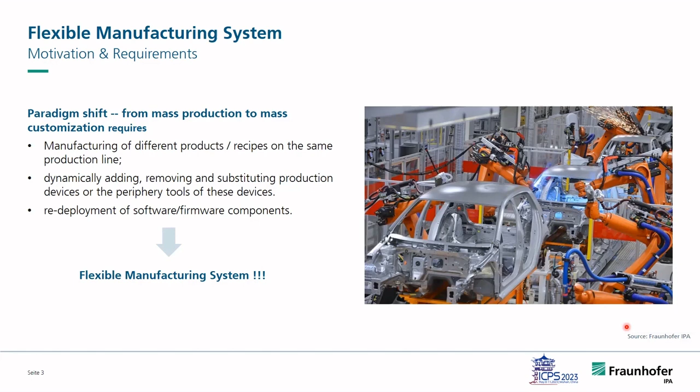More precisely, flexible production means manufacturing of different products or recipes on the same production line, or dynamically adding, removing, substituting production devices or their tools, redeployment of the software or firmware. A production system that can meet these requirements is called a flexible manufacturing system. But how to achieve flexible manufacturing has been rarely explained. For this purpose, we propose an asset administration shell-based flexible manufacturing system.

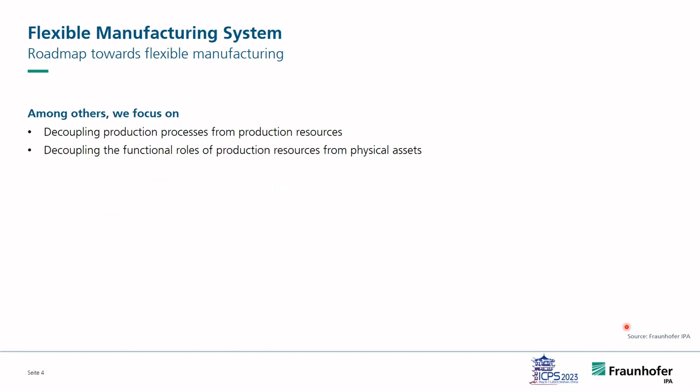Among others, we mainly focus on decoupling the production process from production resources and decoupling the functional roles of production resources from the physical asset. What does it mean? Typically, the manufacturer usually furnishes a product order configuration tool that allows the customer to specify individualized product orders and make product requests. Once receiving the product request, a product order is generated in the ERP system.

In the phase of production planning, the product order is transferred into a production order, where the production processes are divided into a sequence of process steps. We call it bill of process. One process step is defined as the process segment in the IEC standard. It should contain the information of the required production resources, namely production equipment, materials, and the qualified persons.

Conventionally, each process step or segment is directly associated with the corresponding production machines. If this machine is not available, then this production step has to be pending, or the reassignment of this production step to another machine has to be manually done by the production manager, who must be very familiar with the actual status and capability of the production machines and persons.

What we intend to do is to decouple this process segment from the physical production resources. So we introduced a virtual entity called functional role or role-based equipment. That means we introduce two kinds of abstraction. A physical production machine can be abstractly represented by its functional role within the production line, based on its production capability. On the other hand, the requirements can be derived from each process segment.

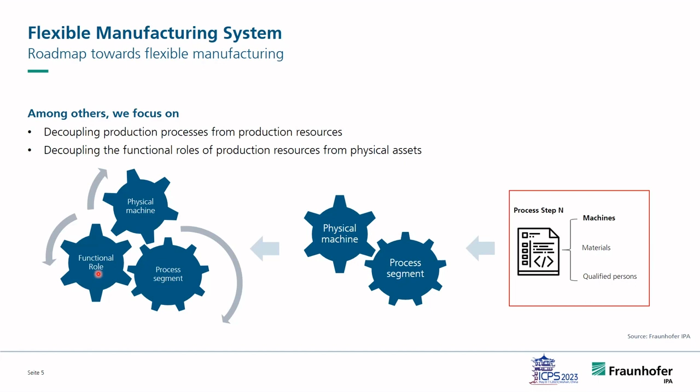Now, the assignment of a process segment to the production machine becomes a matching task, matching between the requirements and the provided capability. In this way, the flexibility is increased due to this abstraction, because the matching can be automated by the algorithm. And furthermore, a physical machine can be replaced by another machine which provides comparable capability. So this is our concept to increase the flexibility.

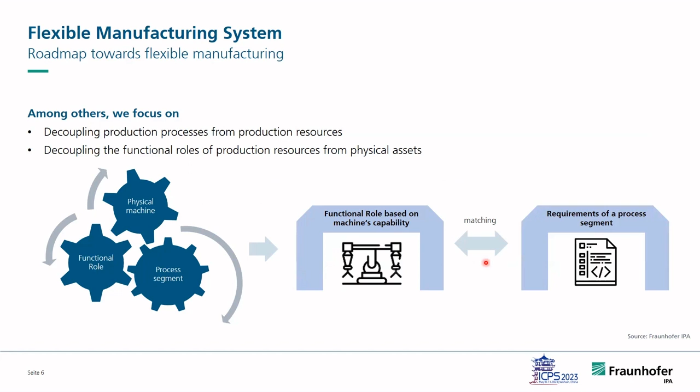The next question is how to realize this abstraction. As mentioned, we use the so-called asset administration shell. AAS is a standardized solution for digital twin proposed by Germany. Now, the government and the industrial associations are promoting this concept AAS to the international standardization organizations such as IEC.

Someone may have heard about the Reference Architectural Model for Industry 4.0, or in short, RAMI 4.0. AAS is the implementation of RAMI regarding information modeling. Today, when we talk about the digital twin, I suppose for most people it often refers to a kind of 3D animation model for simulation or visualization. But the digital twin, as it is defined, is far more than a 3D model.

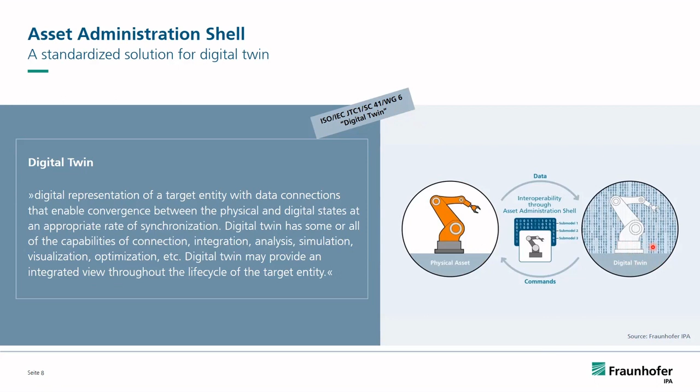In RAMI, physical asset is accompanied by its AAS that contains an interoperable information model to represent these physical assets in various aspects, covering the entire life cycle of assets from conception to recycling. Assets can be physical machines, products, process, or IT service, etc. So it does not have to be a machine. The key word here is interoperable and the various aspects.

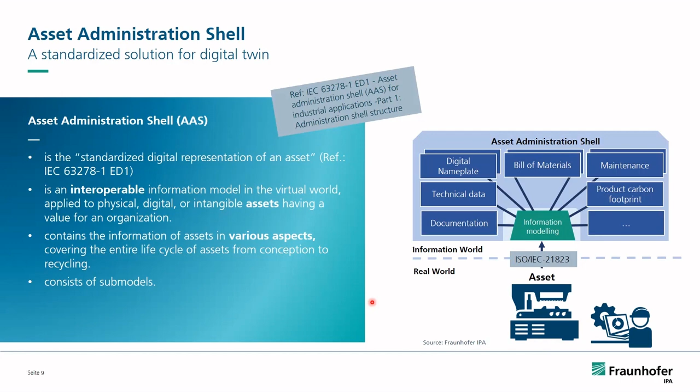Various aspects means for different purposes, in different use cases, we usually need different information about the assets. In AAS, the information in different aspects can be carried by so-called submodels. For instance, the submodel digital nameplate carries the information for identification. The submodel technical data is for the technical specifications of the assets. In this way, the AAS-based digital twin can represent any required information of assets, rather than only a simulation model. In contrast, a simulation model itself can be a submodel of AAS.

The major advantage of AAS is that it ensures interoperability and unifies the namespace regardless of software applications, enabling both vertical integration within enterprise and horizontal integration across the value chain. So this interoperability is mainly achieved by using standardized submodel templates and semantic identification. So the meta model and the specification of AAS has already been standardized as the IEC standard in the last year.

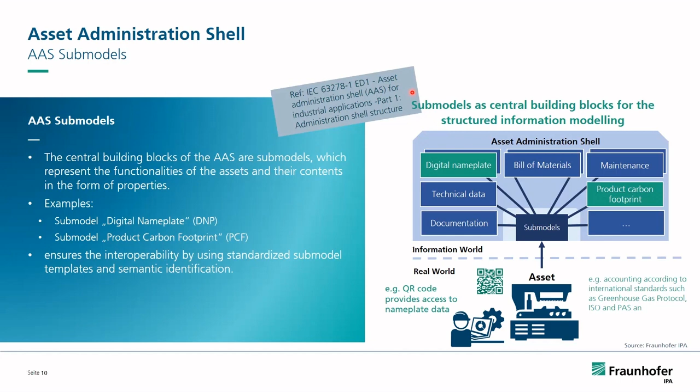And the submodel templates are now developed and standardized by the so-called Industry Digital Twin Association, IDTA. Companies like Siemens, Bosch, Microsoft, Festo, etc. are all members of this organization. The industry people and the university and the research institute sit together to develop the submodel templates.

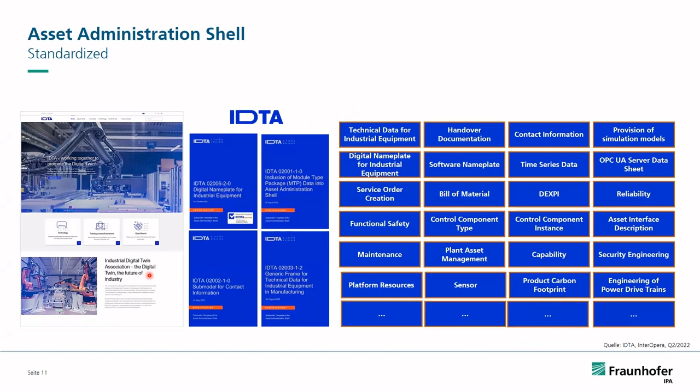As a summary, the AAS looks like this diagram. It has a unique identifier and also contains the identifier of the represented assets. The information is carried by various submodels, depending on use cases. It provides APIs such as MQTT and REST API that can be invoked by other software applications to fetch or fill in the information and data in the AAS and submodels.

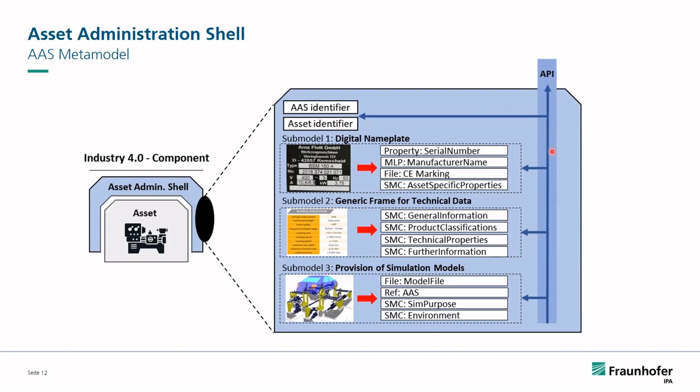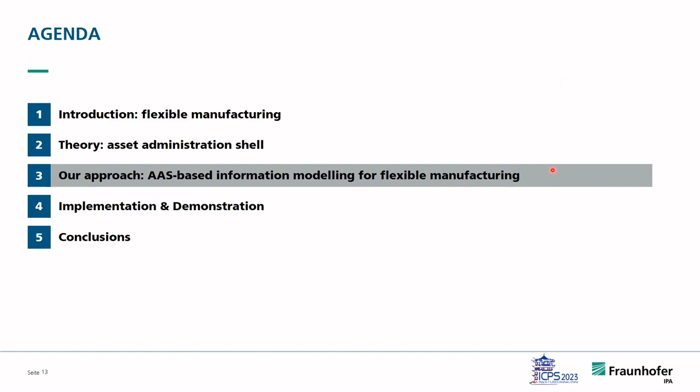Now we have an overview of AAS and the submodels. How we can use AAS for information modeling to realize our goal for flexible manufacturing? Below is the information flow of the proposed AAS-based FMS for production planning and control. For production ordering, the product-related information can be provided by a predefined AAS of the product type to the customers. The AAS distinguishes between instance and type. As mentioned, once a product has been ordered, the AAS of the product instance is initialized. The product order, the production order, etc. can be modeled as submodels of product instance AAS.

Taking production order as an example, in the AAS meta model specification, several classes are predefined as the so-called submodel elements, such as a property, a reference element, a file, blob, operation, etc. Each type of this submodel element has its own functionality. They are the basic building blocks for information modeling with AAS. The most common one is the property. For instance, the production order, production type, etc. are defined as the properties. They can have different value types: real, int, a string, whatever.

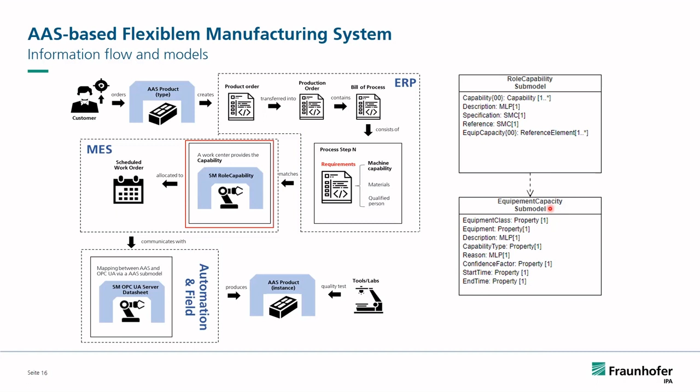Now we have every piece of information for production planning. Matching the requirements with the equipment capability can be done by algorithm. In this way, the planning process can be automated. Moreover, if physical machines are not available, this functional role can be assigned to another machine with equivalent capability.

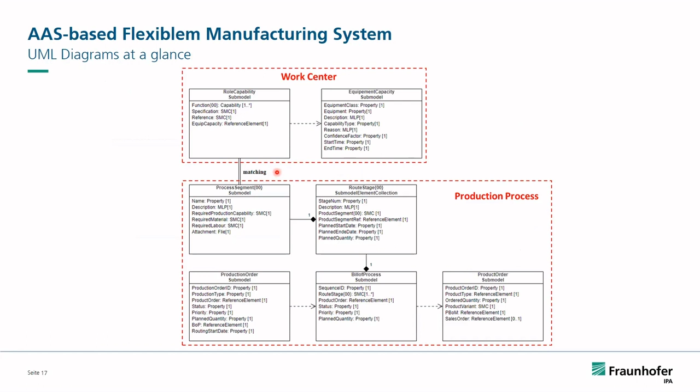We implement this approach using different tools. The AAS modeling is done by using AASX Package Explorer, which is an open source tool developed by the organization IDTA that I mentioned before. As can be seen, the physical asset has two AAS. One represents its physical characteristics, which is typically given by a machine supplier. The other one is its functional role in a production line, containing information such as the location, capability, and the OPC UA server information for monitoring.

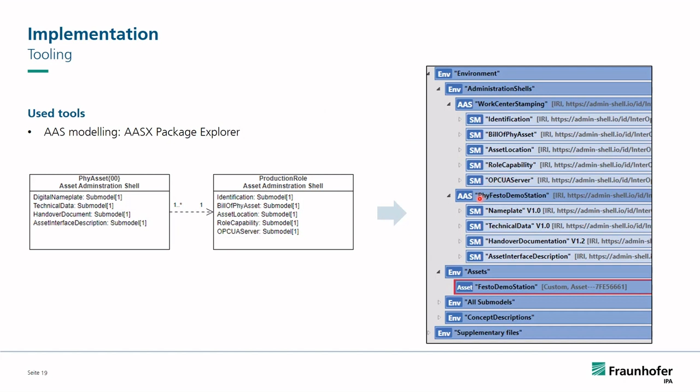The data integration is done by a self-developed middleware called Manufacturing Service Bus. It hosts the AAS server and the registry, containing the static AAS and submodels. The dynamic ones can be hosted at the edge side and made accessible via the AAS registry to provide access to other software services. MSB connects the machines at the automation and field level via various standard protocols such as OPC UA. Software services such as MES and ERP can be integrated within MSB through appropriate adapters.

In this implementation, InfluxDB is employed as a database and connected to the MSB, so that the field data collected by the OPC UA server can be directly stored in the database. Also, the AAS themselves can be stored in the database. This implementation also involves the BaSyx Java SDK for AAS.

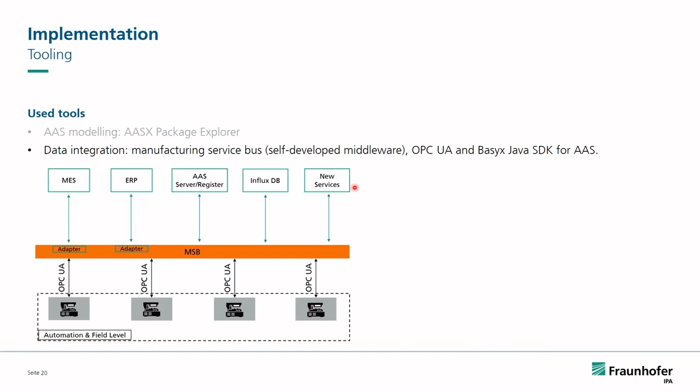We demonstrate this approach on a Festo demonstrator called CP Lab. It represents a sheet metal stamping machine that can punch the workpiece surface into a specific shape based on the stamping die. The demonstrator mainly consists of a conveyor system, the workcell for press tending, and the workcell for turning over. Each workcell, along with the associated conveyor, is driven by an electro-pneumatic system controlled by a Siemens PLC and can be operated by an HMI panel.

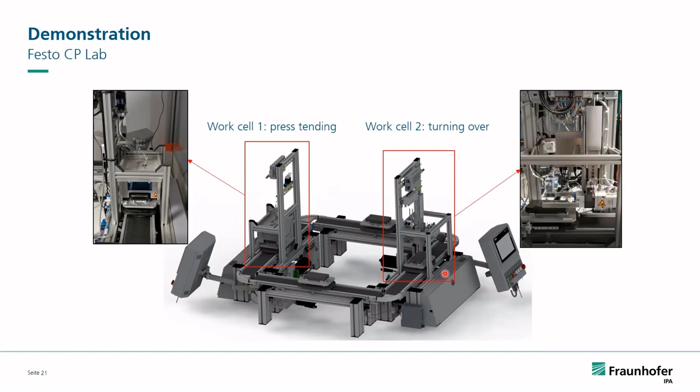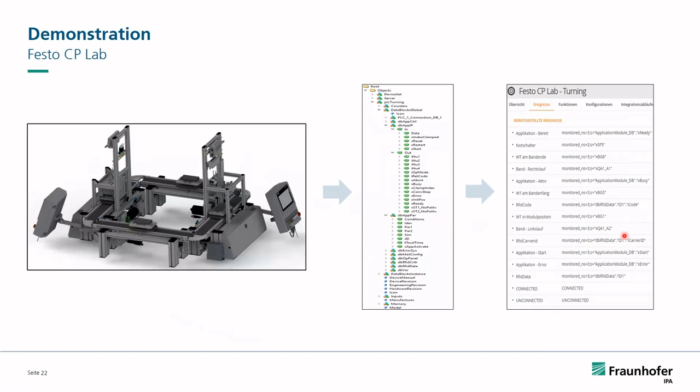Basically, this demo shows the production control and how the AAS works together with OPC UA for condition monitoring. We did not find a way to simulate ERP and MES systems, so we did not demonstrate the process of production planning. So this will be our future work.

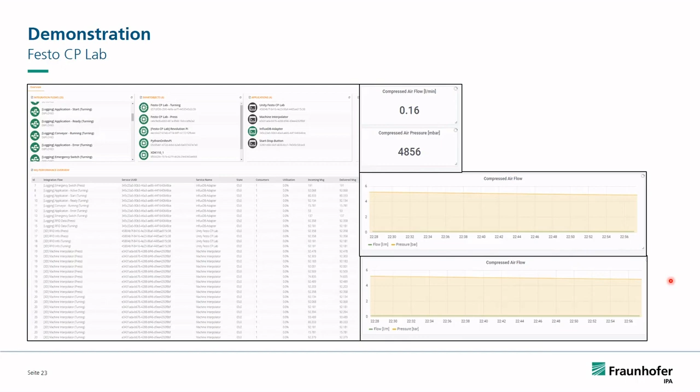Finally, conclusions. The AAS-based flexible manufacturing system was proposed to improve the fundamental flexibility of a production system by decoupling the physical assets from their functional roles and decoupling the role-based equipment from the production processes. This can be achieved by AAS-based information modeling and results in flexibility in production planning. For production control, the AAS can work together with standard protocols such as OPC UA and bridge the data from the field to the MES and further to the ERP system.

Notably, the current work lacks the implementation of an algorithm for capability matching, and the demo for production planning is also missing, which will be addressed in our future work.